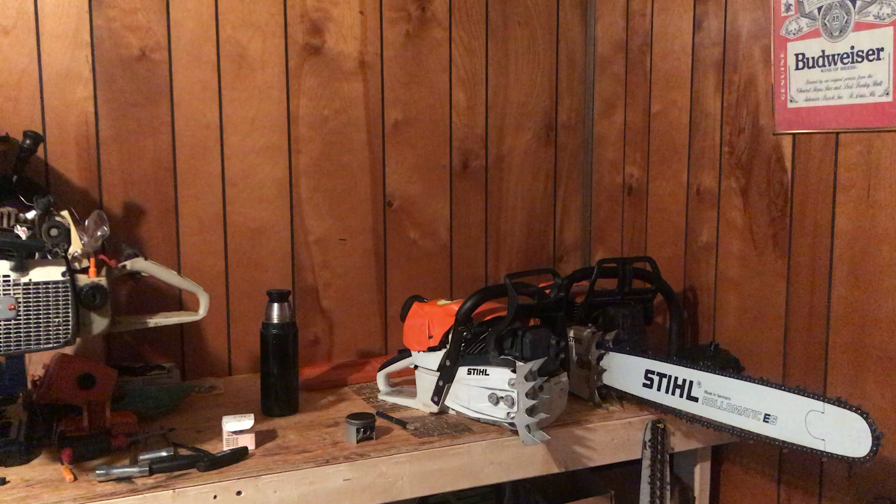Okay, just want to make a little video talking about porting here. Okay.

Oh, that coffee's good.

So, where did this whole idea of porting come about? Well, I personally wasn't there when this happened. The story was told to me. And basically, how it was told to me, guys out on the West Coast that were falling the old growth were running these big, heavy saws, big, heavy steels and whatnot.

Some of them had a bar on the end where you had another guy holding on while you're running the saw. I mean, these things were tanks, man. You had to be a powerful man to run one of these things. Well, they started coming out with the German hot rods here. Andreas Stihl came over and he brought his saws to every logging camp and let the guys run them, and he did the legwork, and it paid off for him.

But that's basically why they made these saws ported. They wanted a saw that could punch above its weight class and allow a guy to produce more. A lighter saw, let's say, just modern times here, we'll say a 70 cc versus a 90. And the 70-some cc saw was a lot lighter. They modified them, and it wouldn't wear the man out.

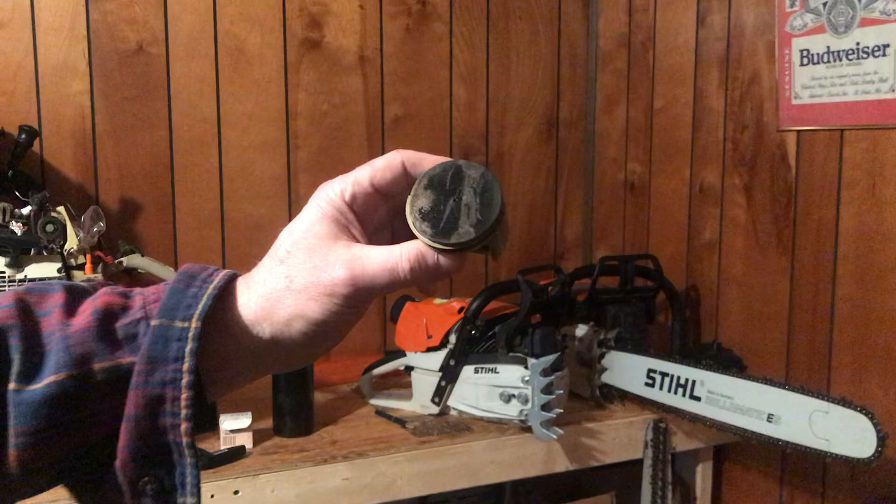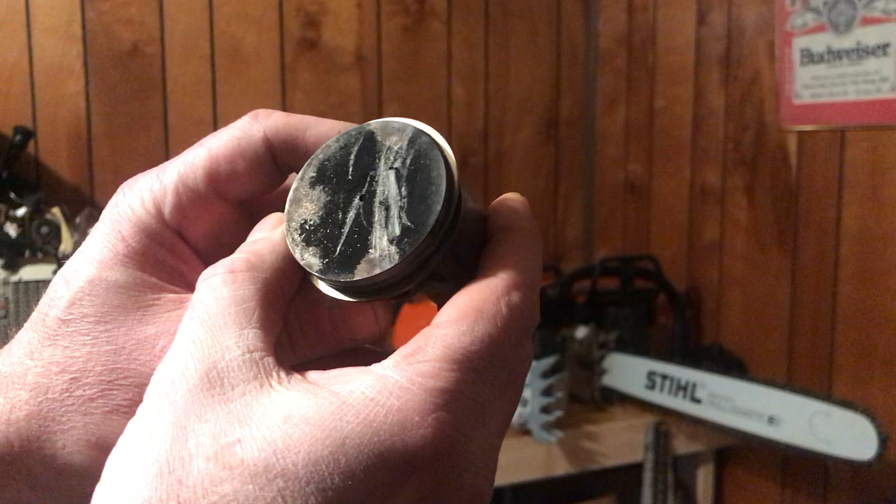Yeah, okay, you can see. I'm going to stand back here. This is actually an 064 piston. Okay? Now, if you look at it, you can see that there's some carbon on there. And look, I can scrape that off with my thumb. See that on there? Now, a lot of guys will tell you, well, you're running too rich. That's not correct. Okay? That's caused from a lean condition. Your saw is running lean.

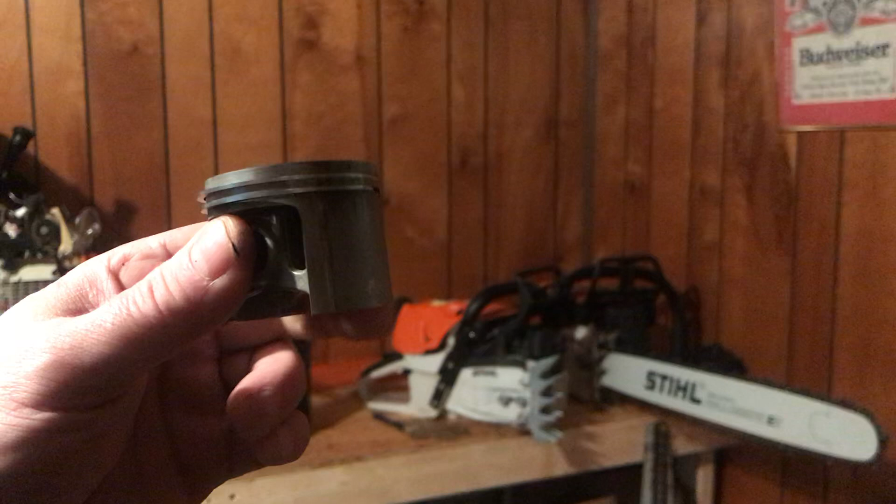The top of this piston, think about it. It's coming up, compressing the mixture, and boom. Okay? It's taking the brunt of combustion. Okay? The pistons themselves, you're not going to be able to see it, but they're actually tapered. And they do that because this top surface is going to expand more than this surface. If this was a round slug and you put it in here and the thing got hot, it's just going to stick to the bore. So it's kind of built in.

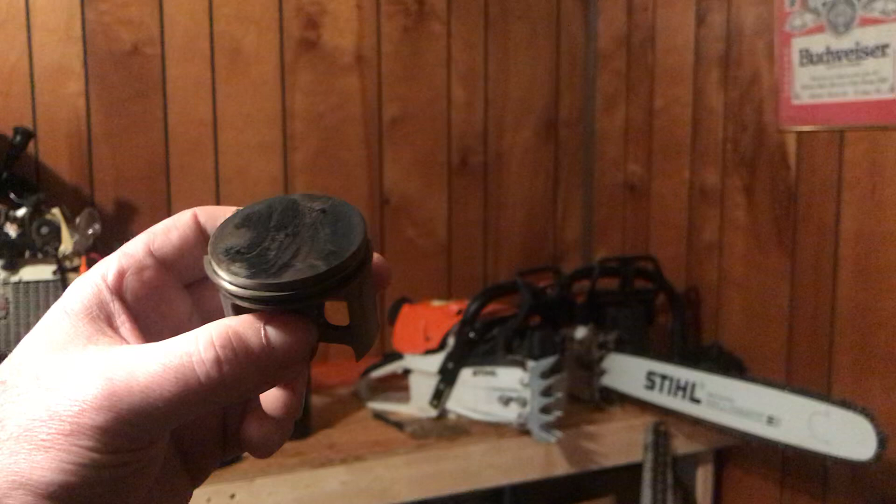I mean, I could show you on another video. We could take a micrometer and mic the thing up, and I could show you. Not all of them are the same, but it's the same general principle. Okay? So, what am I getting at here? Well, I think if you take Joe Blow's saw anywhere in the country and you look at the piston, they're going to have some of this on here, especially if it's a carbureted saw. If you run your mixture a little bit rich, you're going to be better off, in my opinion, because you're going to accumulate less, but you will accumulate.

Now, how much is this? How much carbon is on here? Well, I'll tell you what. Just from looking at it, I'd say there could be 5, 6, 7 thousandths of buildup on here. Okay? So, what am I getting at? Well, this saw here is a Stihl 462. This saw is around, if I can recall correctly, 30 thousandths squish. Okay, well, what are you getting at? Well, I like 30 thousandths squish. And there's a reason why.

There's also what they call a mechanical limit. And the bigger cc's you go up, that mechanical limit changes. Everything, when it gets warm, it expands. And when it's cold, it contracts. Okay? So, I got 30 thousandths squish. And over a period of time, I got 5, 6, 7, 8, 9, 10 thousandths buildup on the thing. Well, what's my actual squish then? So if I got 30 thousandths squish and I got 10 thousandths buildup, well, I'm down to 20 thousandths, right?

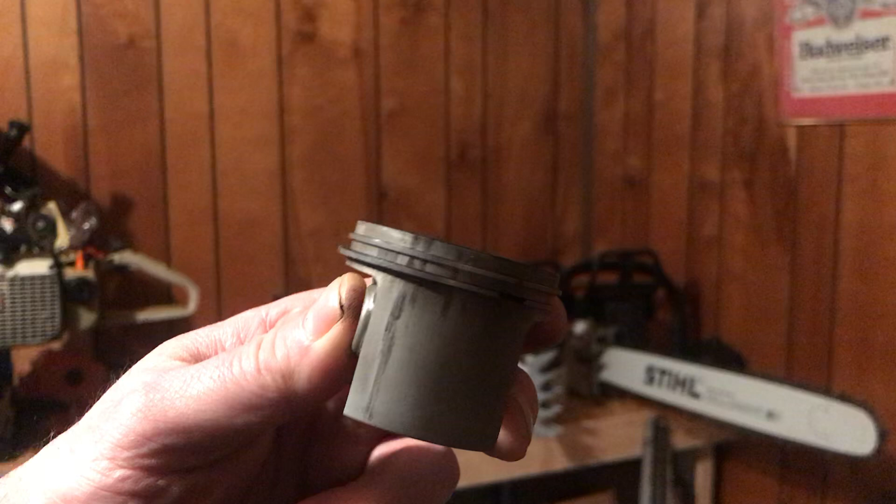Now, if you look at this piston, you can see. Let's see if I got the light right. You see that? That's really no big deal. You can sand that down, and you're all right. But we've all seen them where they scratch. Now you're running 11,000 RPM.

That piston's going up and down 183 times a second, and a piece of this flakes off, a big chunk flakes off. Well, you could do a number to the piston. You really could. Okay, so that's one reason why I stay at 30 thousandths. And I run the Moto Mix, and I haven't had any problem. I got 5, 6, 7,000 hours on some of these saws, and they're running fine.

Now, do I ever run pump gas? Yeah, if I'm going to be doing a whole crap ton of wood, okay, yeah, I'll pick up 2 gallons worth of mix, use it with my favorite oil, run the saw, and then when I'm done, I'll dump out whatever I didn't use, and I'll fill it up with Moto Mix and put it back on the shelf, and they're good.

I mean, Stihl recommends the stuff. A lot of guys think it's a scam to make money. I don't know. I'll go with Stihl Engineering over their word any day of the week and twice on Sunday. So let's get into some porting here, some porting ideas here.

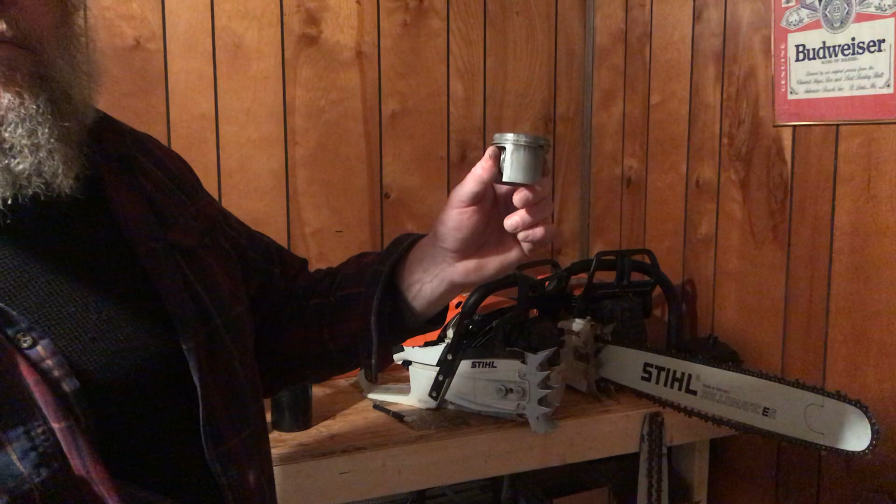I know what the stroke is. And some of these, if you look at the stroke, these things are only going up and down an inch, and depending on the CC, they're only going up and down a little bit. This one's got a 34 millimeter stroke. Whatever that works out, I could look it up. We could do the math real quick. But it's not a lot. It's not going up a lot. So,

I measure with this thing at top dead center, and I get my dimension. Now, I bring this piston down to where that ring just cracks that exhaust port, and I take a measurement. Now, I know the distance from top dead center to the one that cracks it. Okay? Now, if you want to take that measurement and convert it into degrees, I got a program.

I mean, you think about it. The piston's not going around like this. It's going up and down. And the degree wheel is taking this linear motion and it's converting it to degrees. But there's a little problem with that. When this piston goes up, believe it or not, it stops. When it goes down, it stops. Dead stops and comes back up.

Well, that rod at the top, okay, it's forming an angle. And it's whipping around, comes up, comes around the other side, and comes down. Oh, gee, I never thought of that one. And then, conversely, on the bottom, it's the same thing, but now the rod's this way because it's a steeper angle. So, right there, you're off. And I know guys are going to come on and tell me, oh, that's not... Trust me. So now I got my measurement. I measure the piston. I have everything measured out.

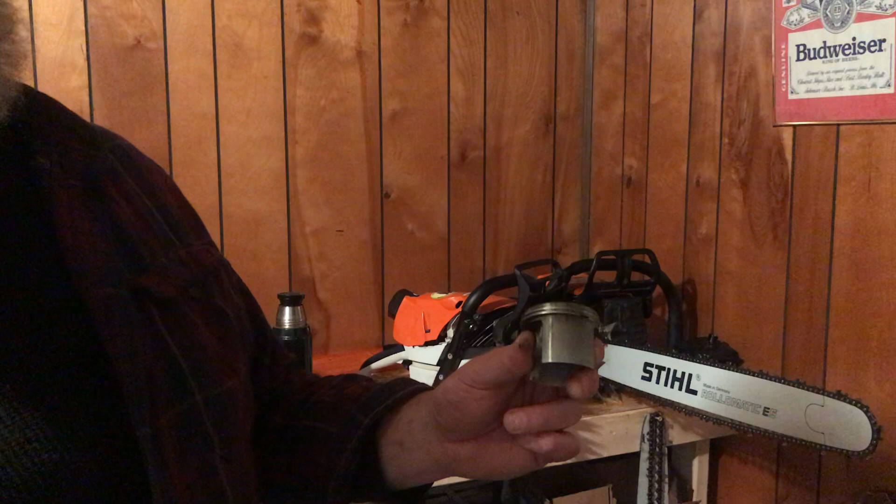Then you measure everything out. You take your RPM you want this thing to run at, measure your ports, you got the distance when it opens, and again, you can convert it to degrees anytime you want, or if you want to use a degree wheel, you can too. I just measure everything because I have precision tools, and I can get the thing very, very close, much closer than anybody's going to get with a degree wheel.

You're just not going to get it closer with a degree wheel than with a thousandths depth mic. I'm sorry, it's just not going to happen. And a tenths indicator, you're just not going to do it. Ain't going to happen. Well, why does it have to be so accurate? Well, your port timing at that RPM, and now remember, at 11,000 RPM, this thing is whipping up and down 183 times per second. That's not a lot of time for this thing to open and close ports. Now remember, this is piston port. The piston's doing everything. Okay?

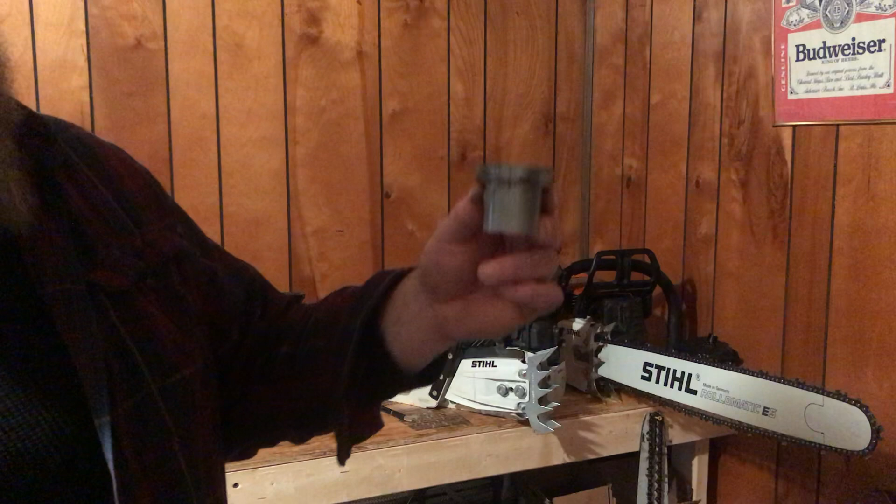If you have a saw that's a reed valve saw, well, then you can get some more intake out of it. If you want to increase your intake, you can go ahead and on the intake side, I got a formula. Depending on the CC stroke, you can put this in your cylinder at the bottom, and you can trace out where the port is. And then you can go ahead and take a little bit out of the piston. So what this will do is, as this thing comes down, it's going to close later, and it's going to open sooner.

I was watching a video about a week back with Donnie Walker and Buckin' Billy Ray, and he said his father used to do that. They call it a quick time. A lot of guys say, well, that's a lazy way to do it. Well, look, I can go fishing with a bobber. You can tell me that's a little kid's technique, but there's no disputing its effectiveness.

You just got to make sure you clean everything up, put a radius on it. On the rings, I chamfer the rings, I chamfer the piston, I do all this stuff. The lands here that go onto the piston pin, I chamfer those too at a 45 because you don't want to catch a ring. There's just little tricks, and like I said, I'm not going to tell you all.

Okay. So now you got your measurements, you got your quick time. You run your calculations, you have your port map, you measure everything. It's a lot of work. It really is. Again, if you're just a tree company or somebody that wants a ported saw, I'm gonna tell you right now, you're better off just buying it from somebody, because plan on spending some money on tooling. Some of these pieces, angle pieces or whatever, they're a couple $100. Sometimes you can find them on eBay. Maybe you can get a deal, but then it's always a crapshoot. You might get something that's serviceable, but you need to rebuild it or whatever.

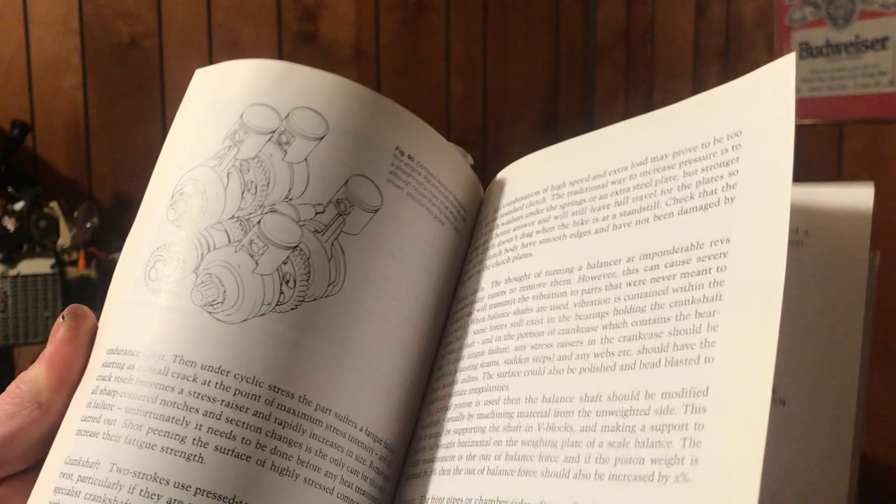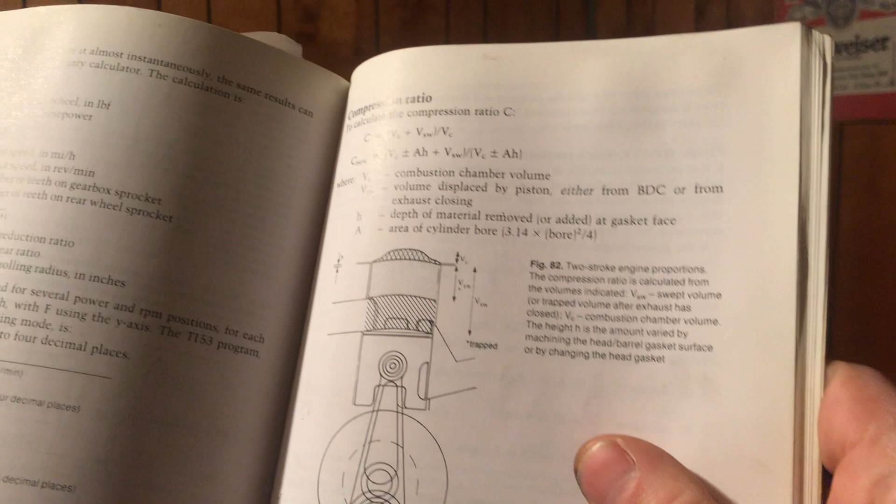So I hope this covers enough for people, and again, watch it as many times as you need to where you get it. I'd advise you guys to get a book like this here by Mr. Robinson. All kinds of good information in here. Programs you can run on your computer. Okay. Now this program is for gearing and whatnot, but he's got everything in here. Your compression ratio. Here's your formula, and again, you have to have some mechanical aptitude. You have to have some ability to do some math.

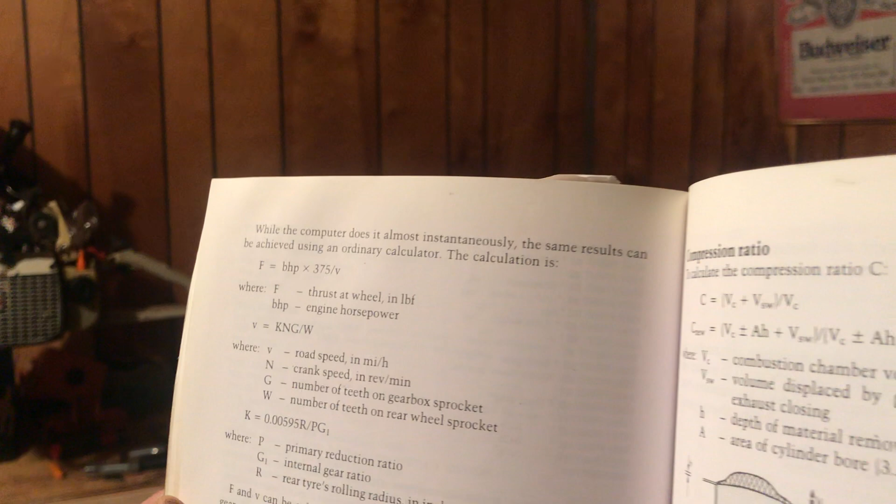Here's a nice program where you can calculate the position by numbers of your degrees of rotation. Excuse me, here it is right here. Piston travel versus crank rotation. Okay? Now, there's guys out there that are saying... you got your different port shapes, what you can do with your transfers. A very good book. Motorcycle Tuning by John Robinson. Everything you need is in this book. As long as you have it upstairs and you buy the measuring instruments and you want to work on it, you can do it. And the guys out there saying, well, that don't have nothing to do with a chainsaw. Well, you know what? You're an idiot.